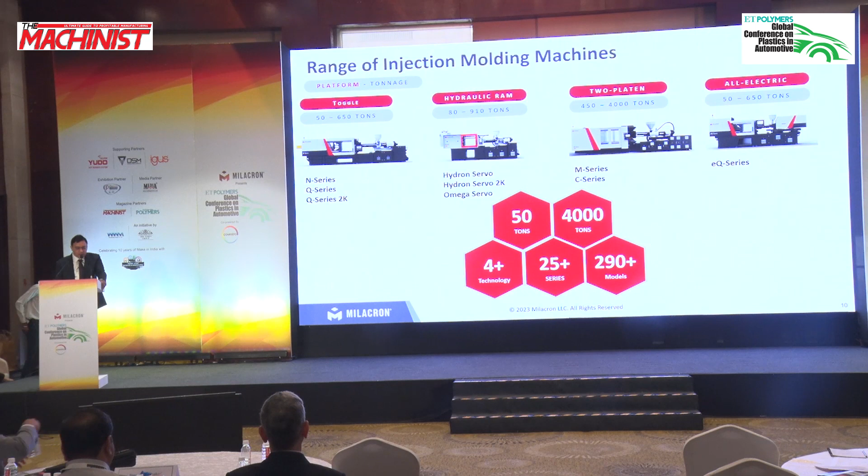So that's the range of injection molding machines. The latest ones, the M series and the C series, were predominantly developed for the auto market and have been a major success in India and also overseas for the automobile market. The eQ series, the all-electric machine, is also quite popular. These have been the flagship machines of Milacron over the last decade.

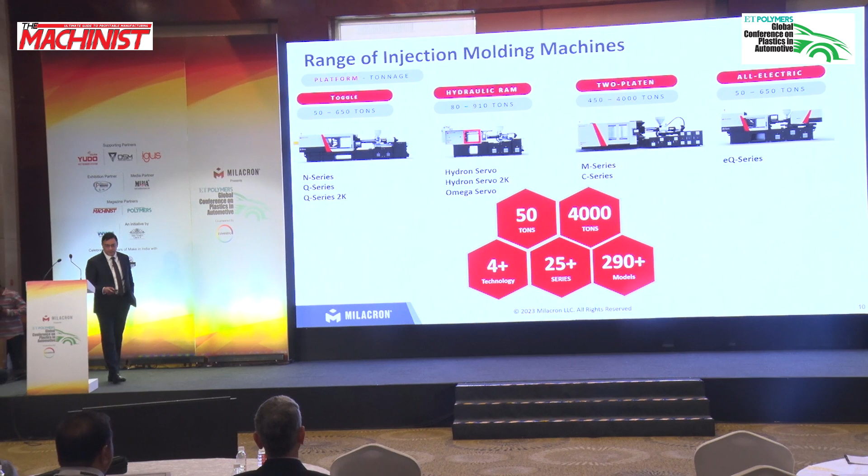When it comes to multi-component solutions, we have MSW — mono sandwich, which means you can have two different materials. It's a co-injection technology in plastics, where the outer material of a part can be different from the core material. Then you have the 2K technology, two color, and the co-injection technology as well.

We are based across India, with more than 100 service people to offer service support in time, and about 50 odd sales people. Why is this slide jumping?

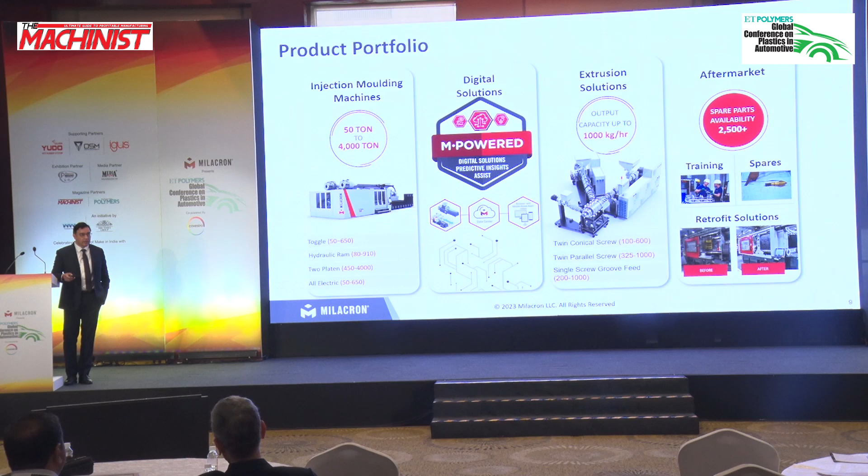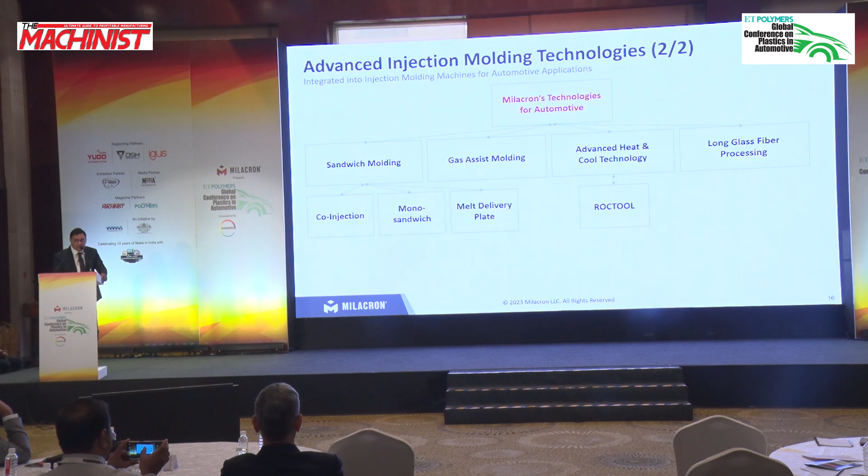Moving on to technologies for automotive, there are three major components here. The first is Milacron's technology package and the core back technology, which has foaming technology as part of it, with three sub-technologies: chemical blow agent, the Mucell technology, and iForm. Then we have overmolding technology, where we talk about coining, robotic transfer, and rotary table transfer. And then we have co-injection technology specifically for automotive, including sandwich molding, gas assist molding, advanced heat and cool technology, and long glass fiber processing. These are all the technologies that have been supplied specifically for the automotive segment. I'll try to quickly cover all of them one by one.

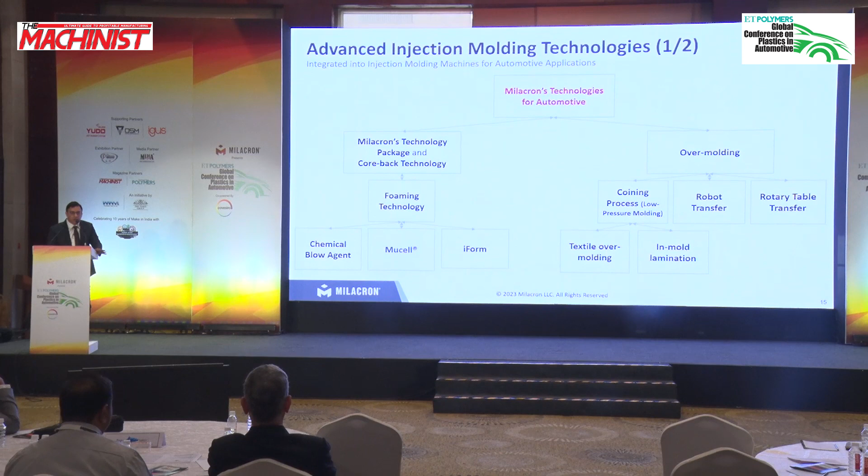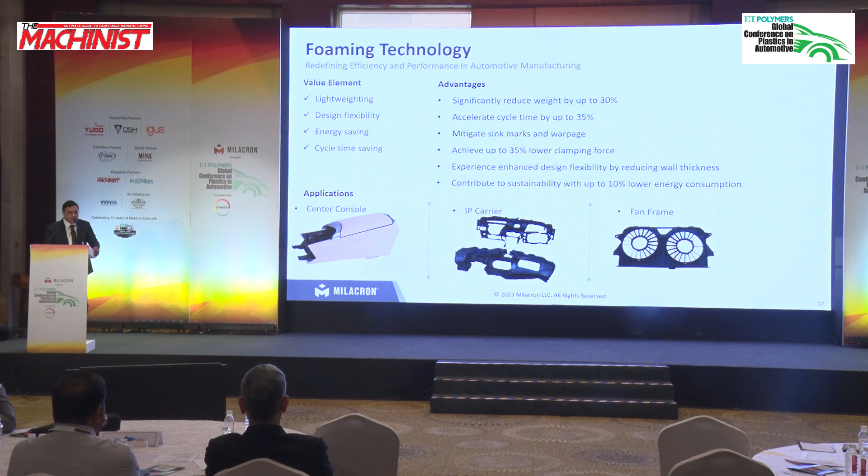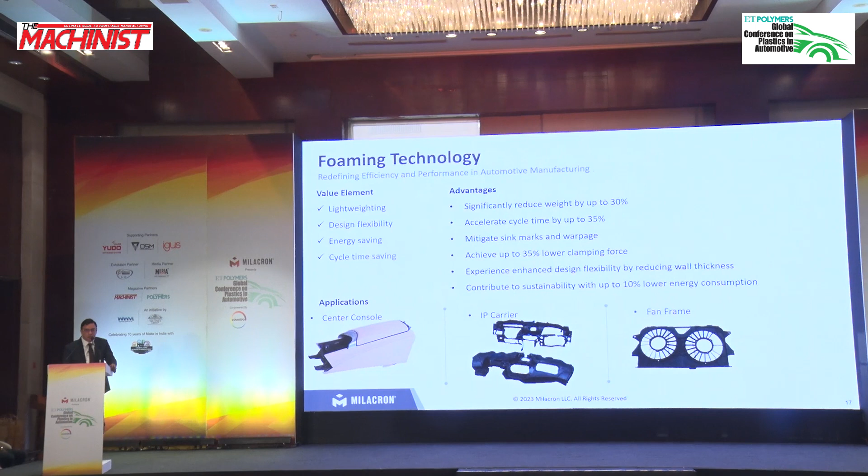The first one is foaming technology. The whole idea here is how to lightweight the component, give design flexibility, and have a faster cycle time, so you can reduce weight up to 30%, cycle time improves by 35%, and a lower clamping force is required, so the capex can go down. You can have a one size smaller machine if required, and it also adds to sustainability because there's a significantly reduced power consumption to produce these parts. Some applications include fan frames, consoles, etc. These are parts that can be produced through foaming technology.

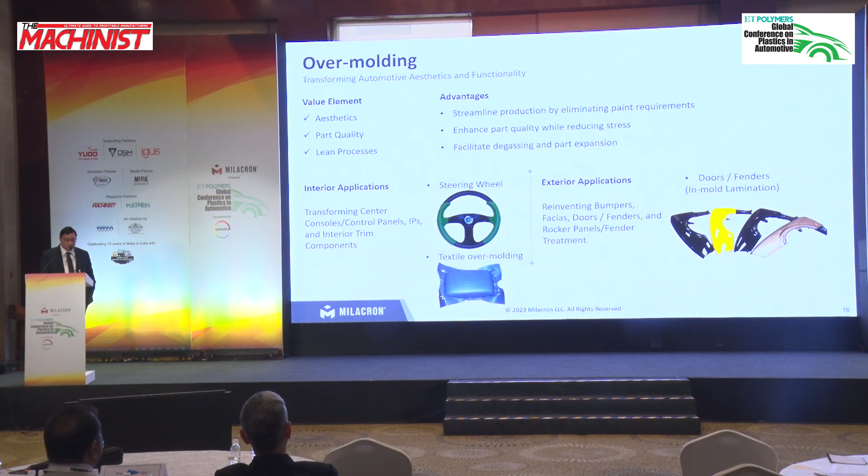Next is overmolding, which is mainly for aesthetics but also facilitates part quality while reducing stress. Applications include bumpers, fascias, doors, and fenders. You can also have textile overmolding. That's the second piece of technology.

The third one is sandwich molding. This is more of a co-injection technology, where on the left you see two exterior mirrors. The black mirror is the core, and on top of that is a coating of a different material. You also see an image of a door handle, with 8 to 15% being recycled material combined with the skin of virgin material. This is the mono sandwich technology I was talking about earlier. The core material is used for different applications — acoustic control, strength, or using recycled materials. So there are several ways you can elevate properties — quality, acoustics, and wear resistance — through sandwich molding.

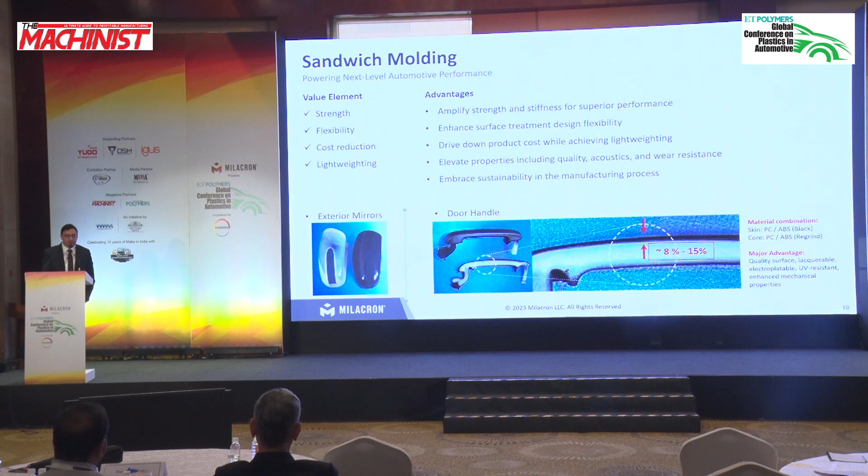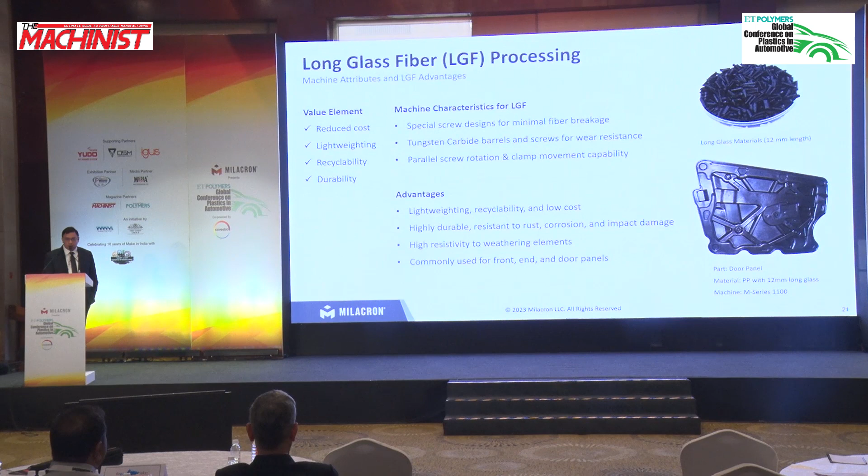Then one more technology we have is long glass fiber processing. This is also one of the types of biomaterials. This has been used by our friends in Germany, where interior door panels have been made using biomaterials. Again, the benefits are lightweighting, using recyclable materials, durability, and reducing cost. The example there is an entire door panel made using long glass materials. The technology we have is a very special Milacron proprietary screw and barrel design to process these materials in our machines.

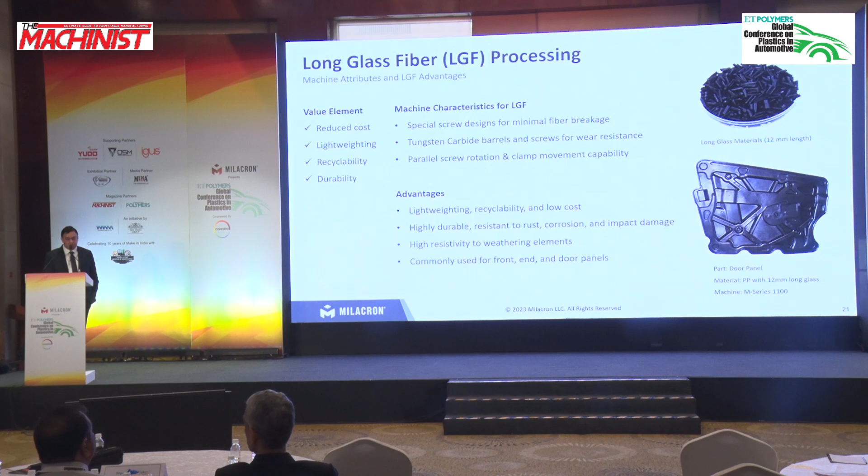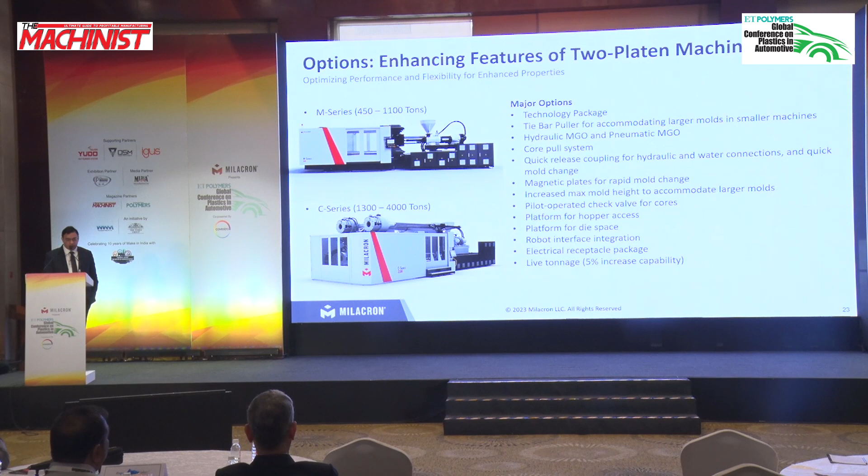Just quickly touching upon the two platen machines designed specifically for the automotive industry. The first one is the M series, which replaces the old Maxima series of Milacron, and the next is the Cincinnati C series, which goes up to 4,000 tons in India, but in the US we have made a Cincinnati up to 8,000 tons as well.

If you look at the M series here, the model that it replaces, the Maxima, it is lesser in footprint. For example, if you had 2 Maximas in your plant, you could replace them with 3 M series. So using the same footprint, you would be able to increase your output by 50%.

Power consumption is less, oil consumption is less. This was completely launched only very recently in 2022, and happy to say that across India we have more than 50 machines already supplied and in the backlog. The acceptability of the M series, particularly in the automobile segment, and also in the crate segment, has been very, very encouraging, and I encourage all of our partners here to learn more about that product.

The C series is of course the flagship model for the highest possible tonnage. There are a lot of benefits that both these models have. Incidentally, both the M series and the C series were co-developed as global products. So the C series that is sold in USA, Mexico, Europe or India is built on the same platform. And happy to say that Milacron is also building a lot of these M series and C series and actually exporting to Latin American countries from India with advanced ANSI safeties and CE safeties as well.

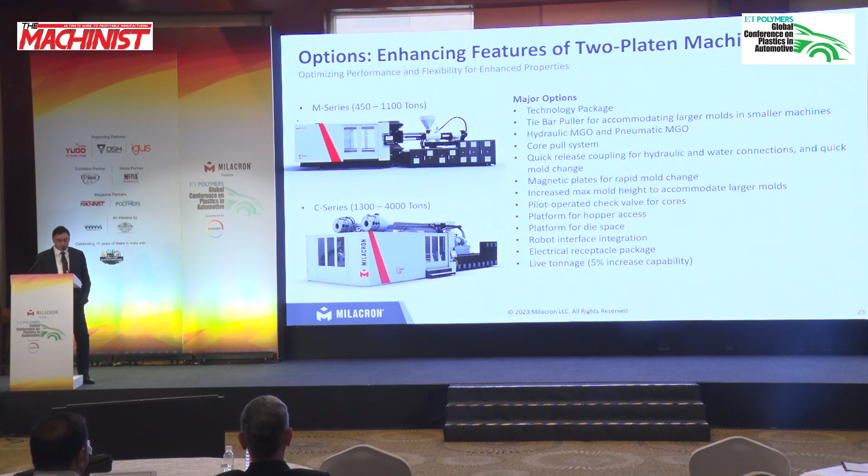Along with the machine, a lot of ancillary auxiliaries are required. We now have the capability to provide all of the auxiliaries around the machine as part of the Milacron machine package, and all auxiliaries will be operated from a single controller of the injection molding machine, which is the master controller. So the operator does not have to operate individual chillers, dehumidifiers, robots from their individual controllers, but can operate from one single master controller of the machine. That's the Milacron auxiliary products that we now have available.

The last piece, and probably something very close to my heart, and the most exciting piece, which is the future, is the M-Powered Advanced Digital Solution by Milacron. This is an IoT-based Industry 4.0 solution.

Basically how it works is that every machine is connected with a red-colored Milacron box, which is connected to your company's ERP and your company's dashboard. Then between 10 machines, there is one green box, which takes the data from all of these machines to a cloud, which has the highest level of security. In real time, we come to know how the machine is performing.

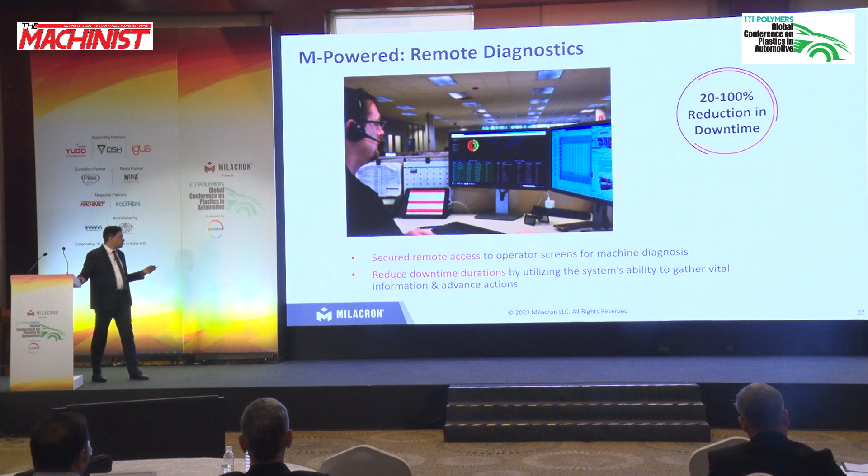That's the first step. We have analyzed a lot of breakdown calls that we have received over the last 10 years, and we have found that up to 20-25% of those calls could have been solved over the phone rather than a person driving and reaching the plant facility. Now we feel that with M-Powered and our technicians' access to your machine and controller, they can offer you instant support over phone. So this is one of the first things that's going to happen.

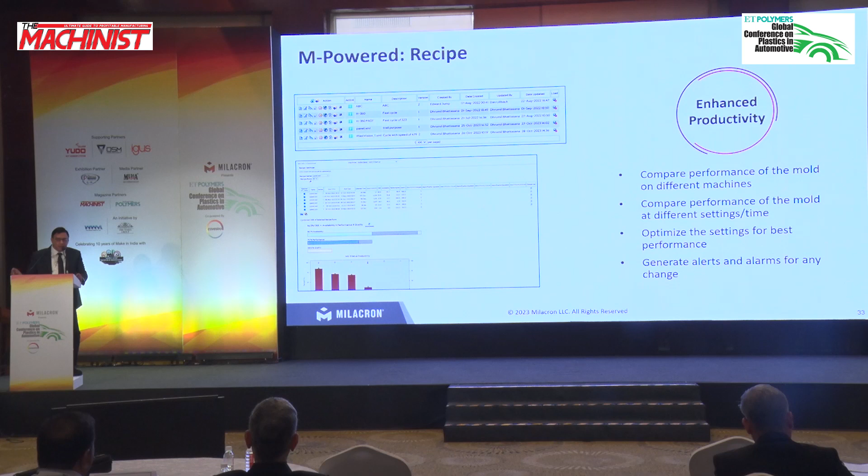We also have a facility for scrap tool and recipe. A recipe lets you compare the performance of one mold in one asset versus the same mold in another asset. Once you test the mold in an injection machine and achieve the best possible cycle output, you press recipe, and those parameters get duplicated again and again in different machines wherever M-Powered is installed. So you kind of take away the need for the operator's skill set to some extent through the recipe model.

So overall, compared to a traditional response where a customer may call Milacron and say my so-and-so part has failed, and then we try to support them the best way we can, a connected machine is a highly profitable machine.

So currently we have about a 95% confidence interval of when a heater band is going to fail. We have 85% confidence when a screw is going to fail, 85% confidence when a screw tip is going to fail, and about 80% confidence when the hydraulic pump is going to fail. This confidence comes from the last 7 years of algorithms running on thousands of connected machines worldwide, analyzing the failure of those components.

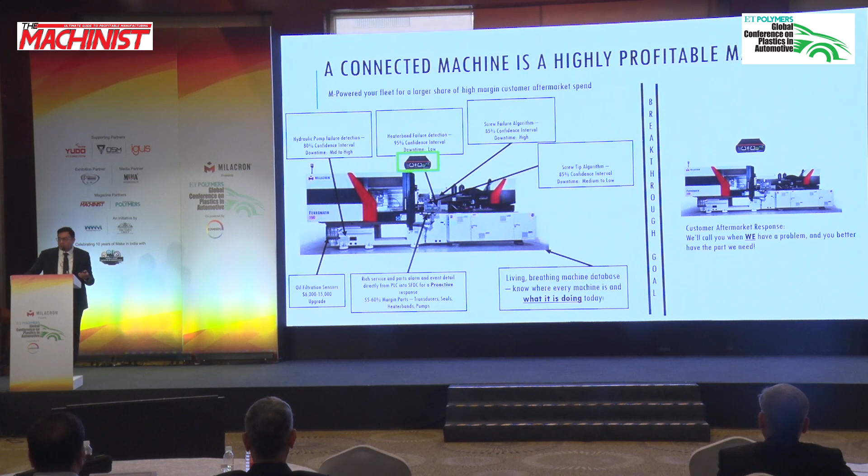We have developed smart algorithms which continue to get smarter every day as more and more machines get connected to M-Powered. So this is something most of the M series and the C series, we encourage customers to go with M-Powered functionality as default so that we are able to support customers in real time.

And finally, API access is always given to all customers to configure their own dashboard and also to configure the machine with their ERP integration.

So that brings me to the end of my presentation. We'll play a short video of the mono sandwich technology that we have, which is a co-injection technology allowing us to use an outer material separate from a core material. Can we have the video, please? Thank you.

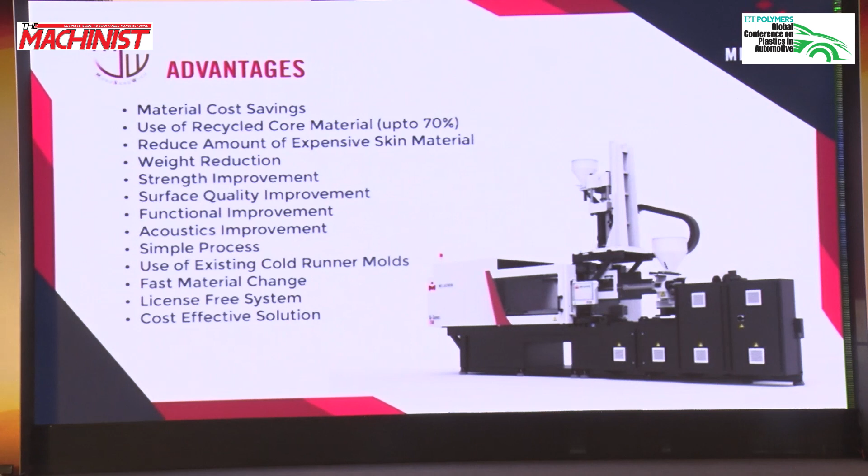So we did this trial for a paint bucket where up to 70% of the material used was recyclable and the balance was virgin polymers, and we did a drop test for those buckets and they passed with flying colors. Several paint bucket manufacturers in India are now using mono sandwich technology as part of their commitment to using recycled materials.

So we are happy to partner to do mold trials at our facility. More than 20 companies have come and we have done mold trials for them at Milacron. You bring your mold, you bring your material, and our engineers will dedicate a machine for you, and we can run trials for a couple of days until we are happy.